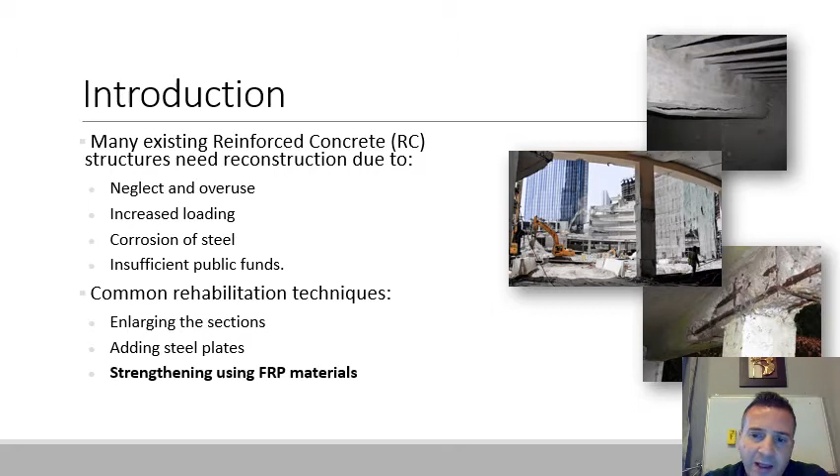In the past they used to strengthen with steel plates, but with steel plates you have the problem of corrosion, and they are heavy. The FRP sheets are on the order of 1 millimeter, and that can enhance your capacity up to 50 or 80%.

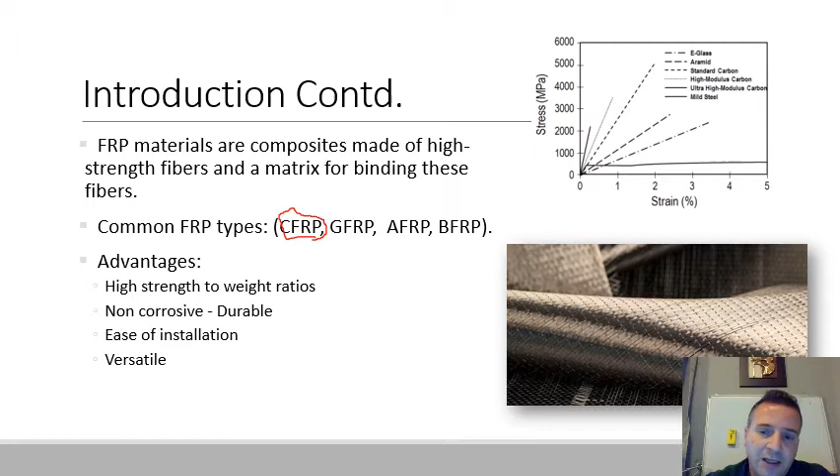There are different types of FRP laminates, among them carbon, glass, AFRP, BFRP. Today we are going to strengthen beams in shear with CFRP laminates. They have high strength to weight ratio, they are non-corrosive, durable, and very easy to install and versatile. You can use them in many different applications.

For shear strengthening, it's like a setup - you have to go perpendicular to the longitudinal axis of the beam, like here and here. This is plating with the two sides, or you can do the U-wrap technique, going around the cross section. This is like the ideal case in columns where you can confine the four corners with a complete wrap. So we want to do T-sections under shear.

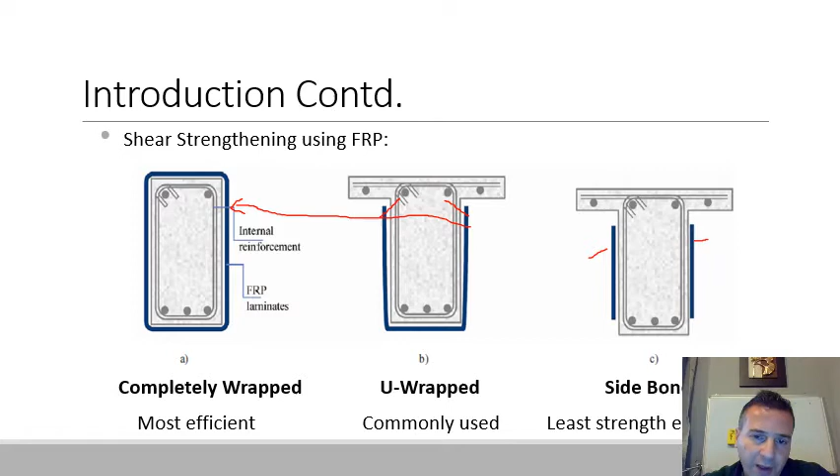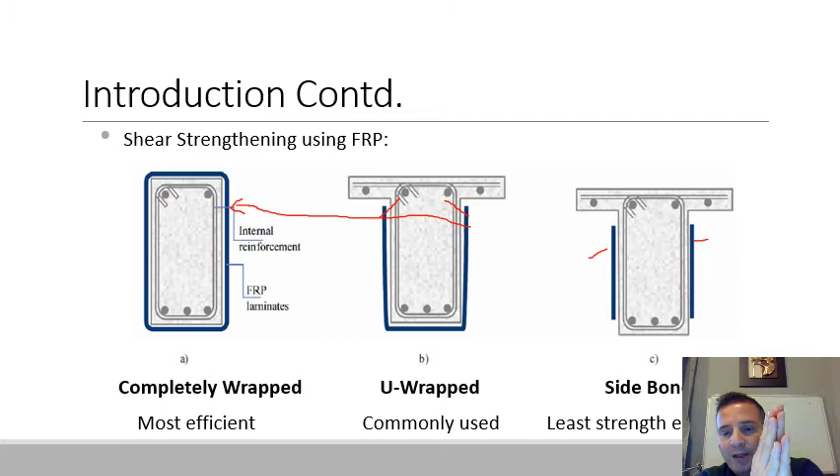We want to get something closer to this behavior by anchoring the sheets inside the concrete, which will prevent debonding of the FRP sheets away from the concrete surface, because a typical failure mode only utilizes 40% of the material strength - after certain loading the sheets debond away from the concrete. This is the shear failure that takes it out. Usually cracks at the interface cause the FRP to start debonding until the FRP system fails, utilizing only 40% of the tensile strength of the sheets.

So proper anchorage of the sheets will delay or prevent debonding. You can have mechanical anchorage, additional horizontal wraps or sheets, or you can add FRP splay anchors. The topic today is to fasten or bond these sheets with FRP splay anchors.

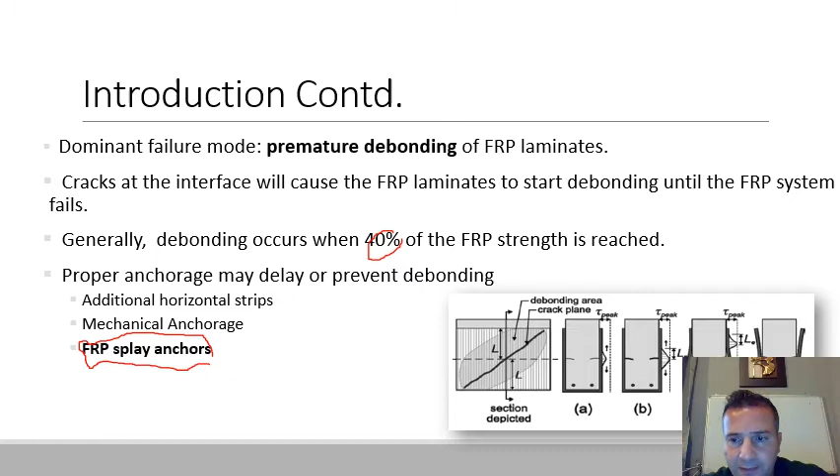These are FRP anchors, splay anchors. You drill a hole, and then with epoxy you install the spike anchors into the concrete. This segment here is called the fan, and this is called the dowel. The advantage is they have better compatibility with FRP laminates, high strength to weight ratio. They are also non-corrosive and can be designed to suit a wide range of structural applications.

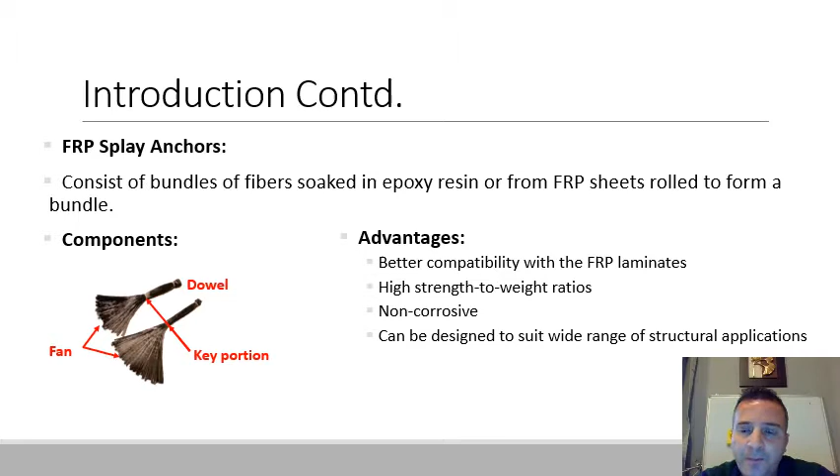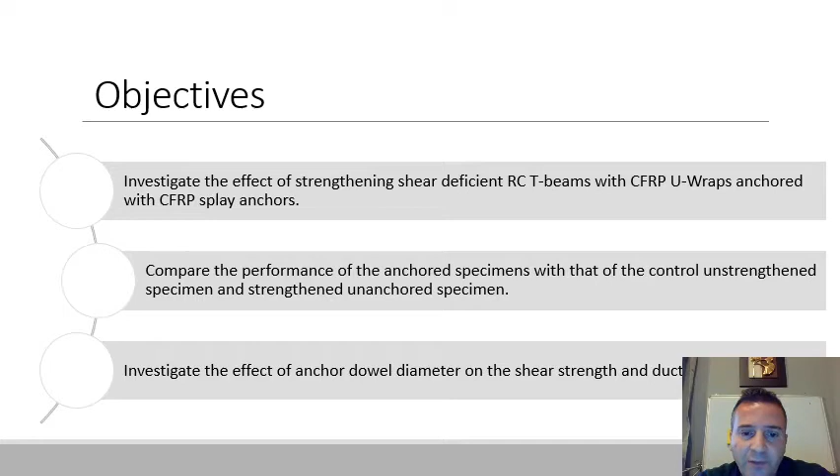The objectives of this research are to investigate the effect of strengthening shear deficient RC T-beams with CFRP U-wraps anchored with CFRP splay anchors, and compare the performance of the anchored specimens with control unstrengthened specimens, and strengthened unanchored specimens. Then we investigate the effect of anchor dowel diameter - we are going to play with the diameter of the dowel or anchor on the shear strength and ductility of the tested strengthened specimens.

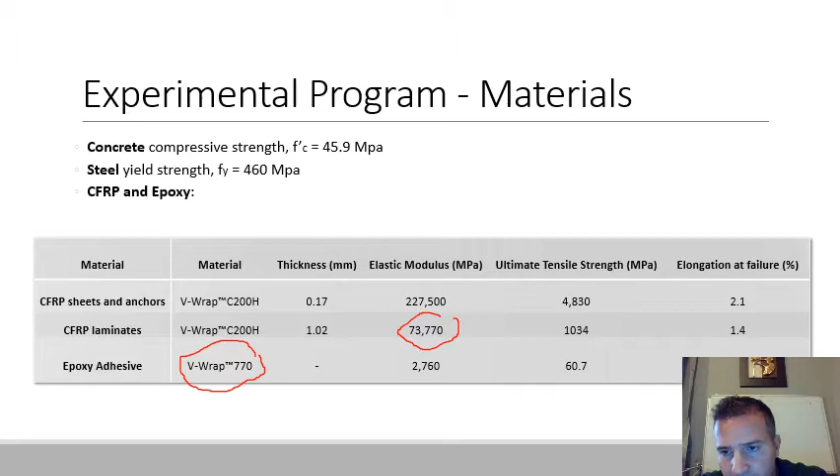So we use epoxy to anchor the sheets. We have in total for this presentation 5 beams: a control, a strengthened specimen with U-wraps but without anchors, one with anchorage of 12 millimeter diameter splay anchors, one with 14, and one with 16. Here are the variables.

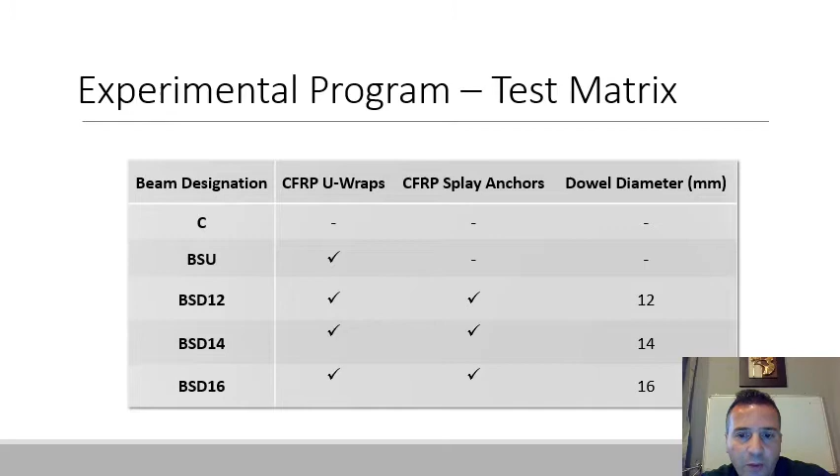This is the control specimen. Since we want to investigate the shear performance, the loading will be 1-point loading, 3-point bending, where the load is applied here. One side of the specimen was heavily reinforced with stirrups so that this side won't fail during testing, and this side was left without stirrups, shear deficient, so we can find the contribution of V sub C plus V sub F.

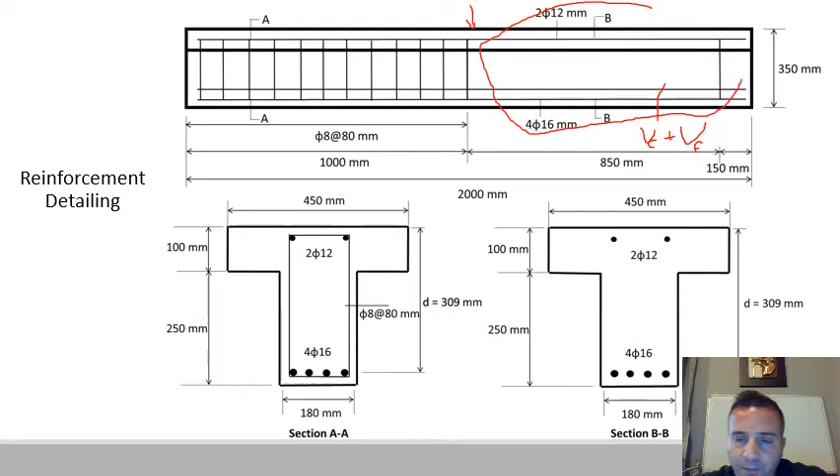We are going to anchor this side of the beam, and this is the cross section. In the T section on the top you have 2 number 12 bars, then stirrups, and below that 4 number 16 flexural bars. It was also designed to have a high flexural reinforcement ratio in order to enforce the beam to fail in shear.

As you can see here, this is the side that is strengthened. This is the unanchored specimen, and this one is the anchored one. This is the splay anchor, embedded inside.

The inclination angle from the top is 25 degrees, so the angle from here to here is around 155 degrees. The fan length is 100 millimeter, the one that we adopted, and the dowel diameter is variable. The embedment length for this inclination is 85 millimeter.

It's very interesting, and the procedure for strengthening is easy. You just drill a hole, and then you punch in the anchors with epoxy until you have a strengthened structure.

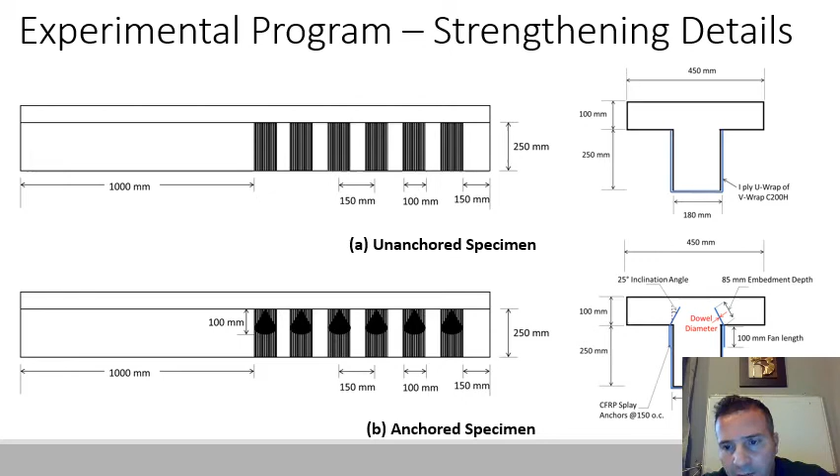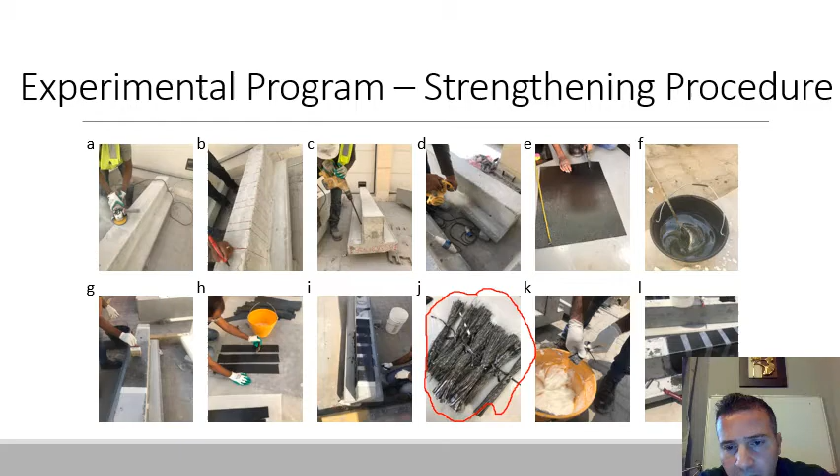Let me show you the preparation of the specimens. These are the control beam specimens cast in ready mix concrete. This is the preparation of the U-wraps, which you can see around here. And these are the splay anchors, which were fabricated manually by the labor and the student. Then you put the epoxy, put it inside the hole, and you have a very nice structure presented here.

This is the experimental program again: you are strengthening one side of the beam and applying one load in the middle. We put an LVDT here to measure the deflection of the specimen, so the recorded data will be the load and the midspan deflection. In addition, we put strain gauges in the middle of the strip to find the strains in the FRP sheets, and to see how much of the capacity of the CFRP U-wraps we utilize.

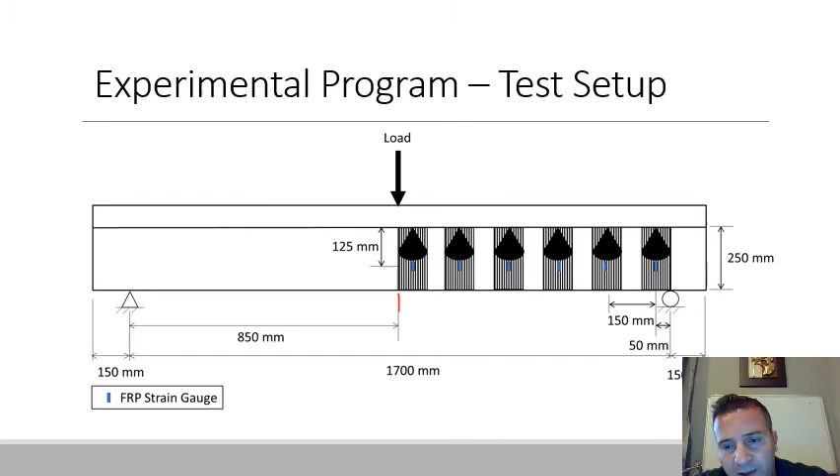You can see here the experimental failure modes at failure; these are the beams at failure. For the control beam, it failed by conventional diagonal crack at about 45 degrees. With the one without anchors, it fails by debonding, the typical failure mode, debonding of the sheet away from the surface, and here you have some pull out of the flange, so debonding plus fan to sheet debonding. So debonding here was prevented and delayed.

For the ones with the other diameters of dowels, you can see debonding of laminates locally between the top and the bottom here, but it happens at a later stage in loading. And this one here again shows debonding of laminates, but also at a higher level of loading.

Now what I want to say here is that we did not apply load, we applied displacement control. The beams were tested under displacement control at a displacement rate of 2 millimeters, or I think 1 millimeter per minute.

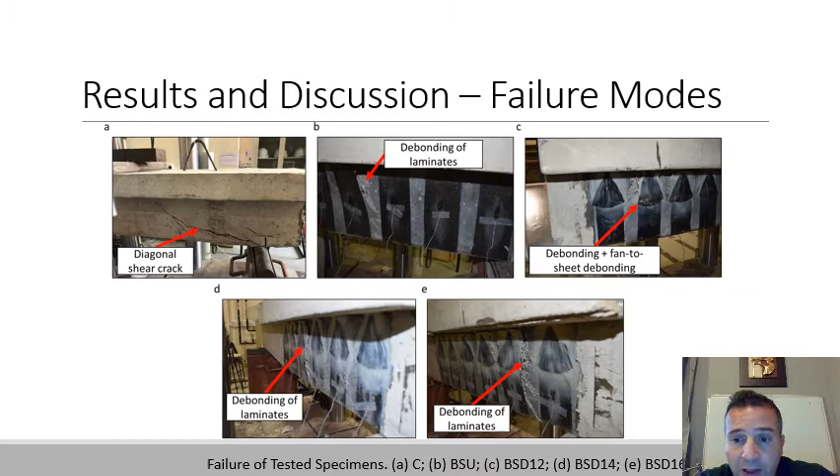This means that I changed the failure mode from shear to flexural. So anchoring the ends of the sheets by splay anchors, in a very simple method, will enhance not only the strength, it will also enhance the ductility.

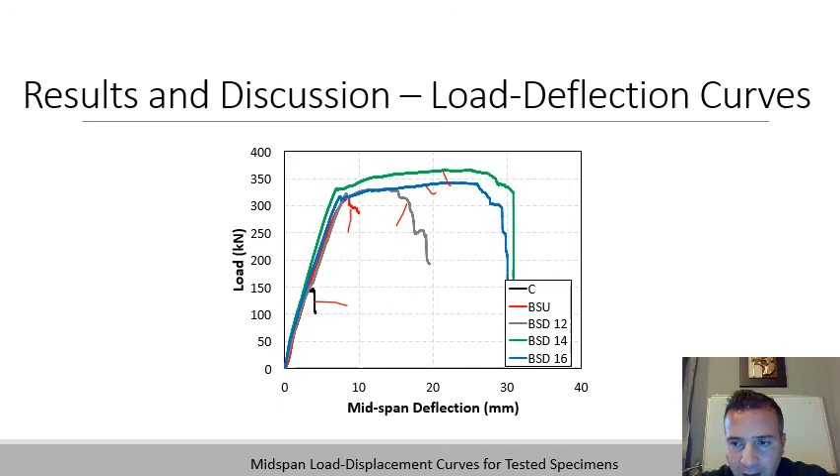And these are the experimental results, a summary of it. You can see here all the loads they failed at, at higher loads compared to the control. 287 to 103, 192 to 103, 89. Sorry, I'm talking about the ultimate load: 317, 331, 365, and 342 compared to 146.

Which is huge. So basically we are doubling, more than doubling, the shear capacity of the beam with respect to the control specimen, and we are enhancing it with respect to the unanchored specimen up to 15% if you are using anchors.

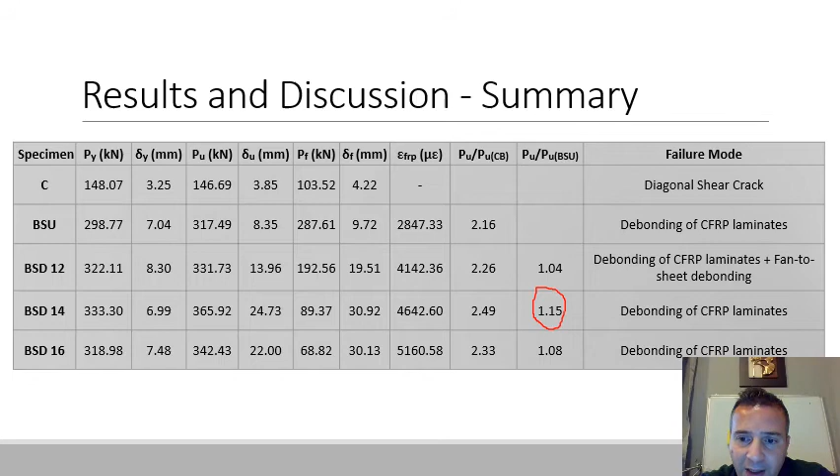Our aim is not only the strength and the ductility. The ductility was increased significantly, and the strains, according to the code shear design provisions, the ACI won't allow you to exceed 0.004, which is like around 4,000 microstrain.

You can see here that all the three sheets, the anchored ones with the dowels, exceeded the 4,000, and this one, with the 16, it was 5,000. So basically we are utilizing more of the strength of the material, and we are able to reach the limit of 0.004, which is related to the aggregate interlock in shear.

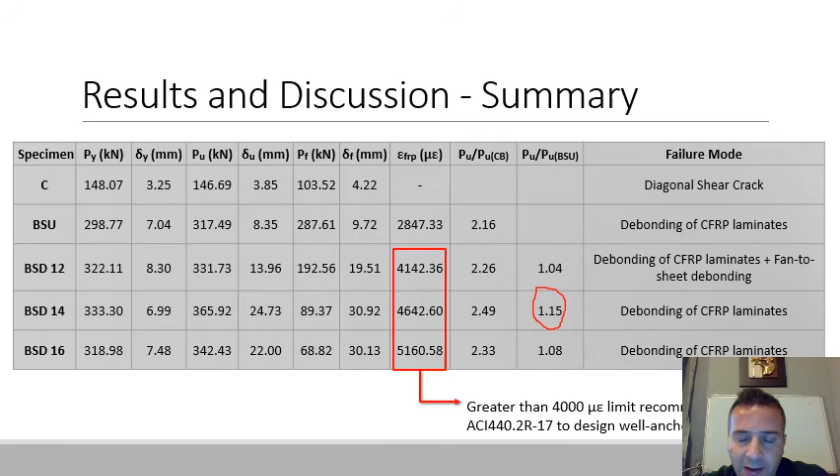Again, this is the results, in terms of the loads. We did not find a clear trend between the anchor dowel diameter and specimen's capacity. The difference is marginal, and also we are using a relatively good value for the embedment depth of 85 millimeters, with the 14 millimeter diameter considered optimum for this design.

So enhancement in capacity might be limited by the choice of embedment depth and hole diameter. A slight reduction in capacity for specimen BSD16 is due to the increase in ratio of the hole diameter to embedment depth of the fiber, which was the same, 85. So basically you need more embedment depth to achieve the same capacity.

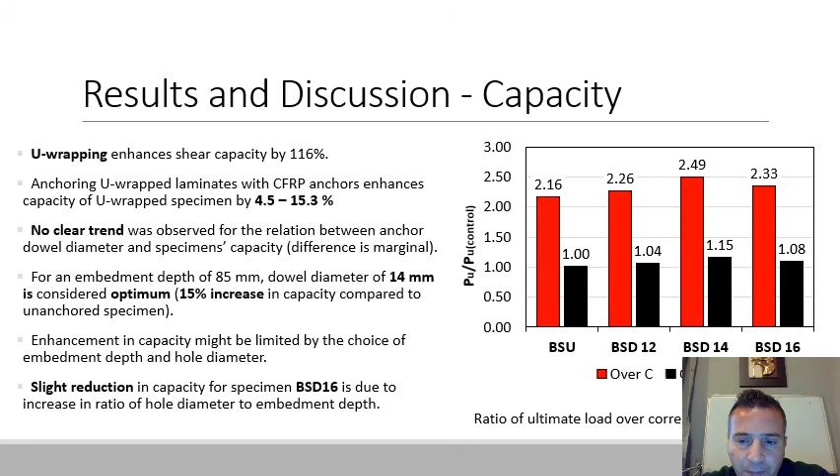And this is in terms of ductility. You can see that the 14 millimeter behaves the best in terms of ductility, 3 times more than the control specimen, because this is shear, and even more than that of the unanchored specimen.

So very interestingly, anchoring the sheets with splay anchors will enhance both the strength and, most importantly, the ductility of the member, and most likely will give you an indication of failure. So basically the beam is going to fail in a ductile mode rather than in a brittle and sudden mode.

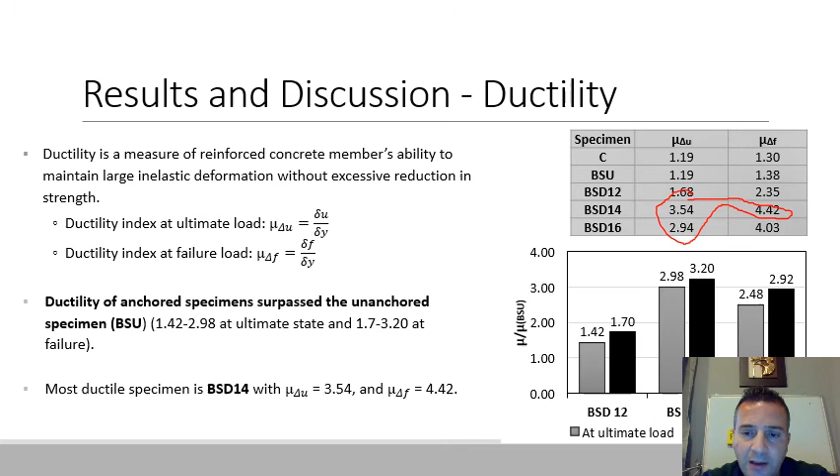So in conclusion, shear strengthening with CFRP U-wrap laminates enhances the shear capacity. However, failure is dominated by the brittle debonding of the laminates. Anchoring the U-wrap laminates with CFRP splay anchors delays debonding of the wraps, improves the shear capacity of the unanchored wraps, and significantly enhances the ductility of the beam specimen.

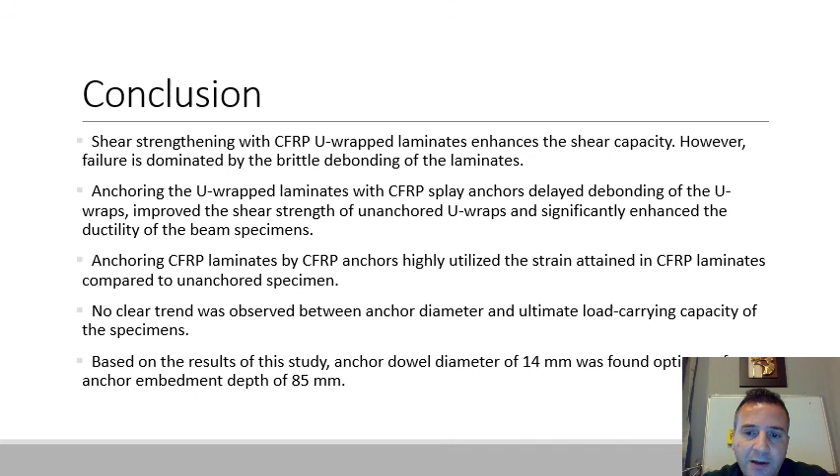And based on the results of this study, the anchor diameter of 14 millimeters of splay anchors was optimum, with an embedment depth of 85 millimeters.

And for future research, we conducted an extensive study. We varied the angle, the depth, the dowel angle, the fan angle, the angle of the embedment, and we also varied the diameter and embedment depth, in an extensive study with beams with a slightly modified cross section. This one we took as a pilot study, based on which we designed a set of 20 beams, playing with all different parameters, to investigate the effect of several variables on the performance of anchored FRP sheets in strengthening RC beams in shear.